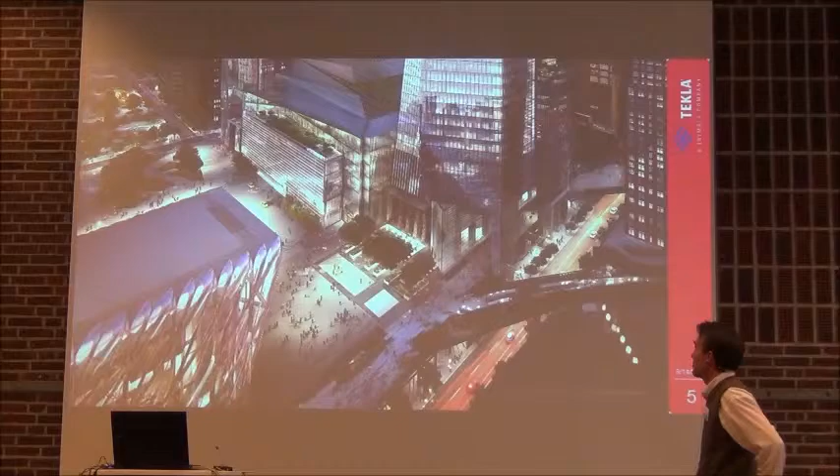Well, keep looking up, because next time there's a whole part of New York which is being regenerated. It's called Hudson Yards. It sits on top of a railway track, and Tekla, of course, is well in the centre of getting those models and those buildings together. It's just near the World Trade Center, just north of that. Lots of really big projects going into one of the towers that's been done in Tekla, with lots of really big numbers, of course.

As I say, this is a massive scheme, a $20 billion US dollar construction scheme for the whole area. Mainly, a lot of it's down to the cost of the land, obviously. But in there, you've got 30 Hudson Yards. It's this building, not this building. Completion by 2019, around about the height of the Empire State Building, with lots of floor area. The architects are KPF, and the engineers are, of course, Thornton Tomasetti.

And don't forget, in the US, it's very much like, I guess, in Denmark, the architect very much drives the project. The engineers are employed under the architects, so it's very important that that team works together well. So how's this going to happen?

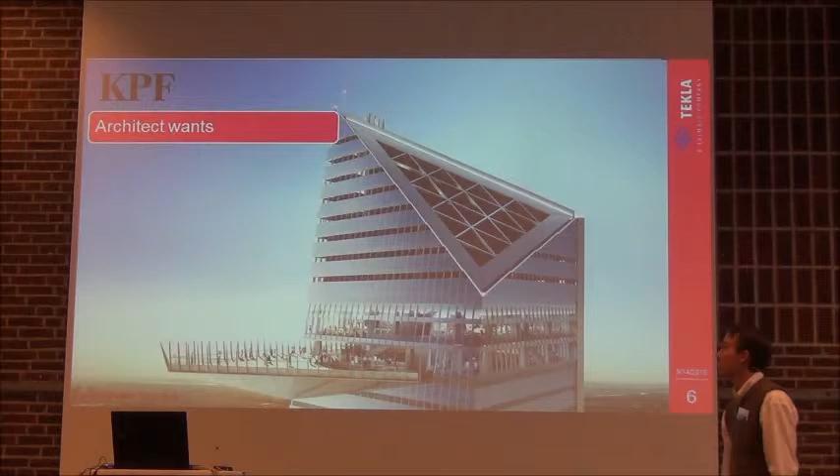Well, KPF, of course, want as much detail as possible. Because when you're doing cladding, setting out, when you're doing all of your setting out of your building from face to face, you want to know how you can maximize your office area, and minimize the spend on the buildings. LODs are really important, and you want to avoid redrawing structural.

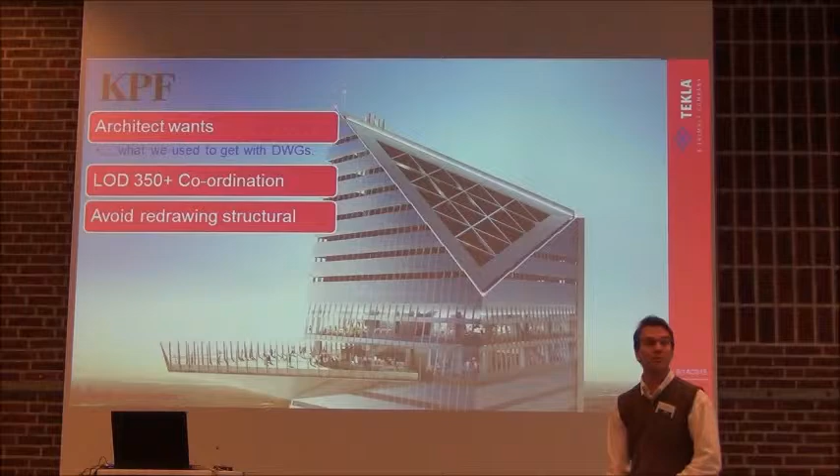They're essentially, in many ways, in all my years as an architect, that's what I wanted. I wanted as much information from the engineer that I could, that was accurate, so that I could reuse that. And of course, that's what we had with DWGs for years. That's the background, I guess, of what an architect wants: as much information as they possibly can, so they can reuse that and set out to that. It's very much a DWG story.

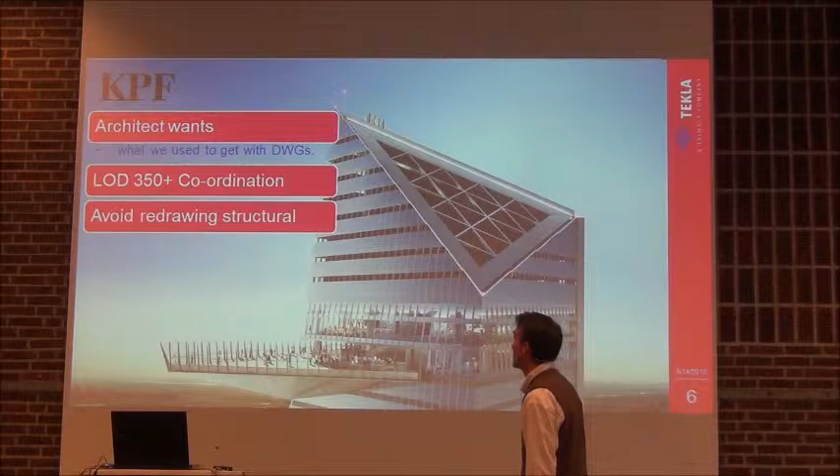So what is a LOD? That's the term I just used. LOD 350, for example, level of development. You guys have had this already for years, talking about levels, 1 through to 4 to 5 to 6. The LOD is kind of, I guess, a phrase that's being built out of the BIM story. We're trying to explain exactly what you need to deliver as an architect on this project, or an engineer or MEP guy on this project. What level of detail are you working at?

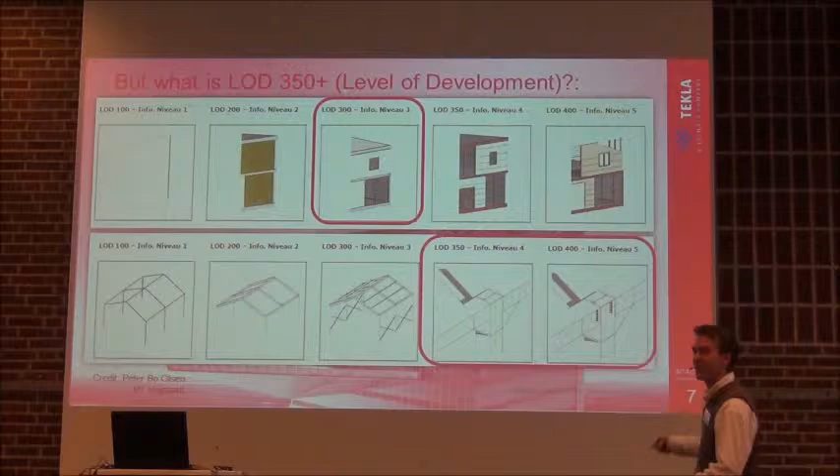Engineering-wise, that means LOD 300 is about here. The challenge, of course, is that Tekla instinctively, out of the box, goes to 350, 400 very easily. It's very hard when you're using Tekla to model down here, because it's always been designed for LOD 400 to 500, and it does it automatically, as you can see here.

So it's just me trying to play around, trying to recreate Peter's work here - thanks to Peter for this. But it's very hard to actually just create half of a LOD story. So that's the challenge: Tekla is very much a product that designs to the end game from day one. It's very good at doing that.

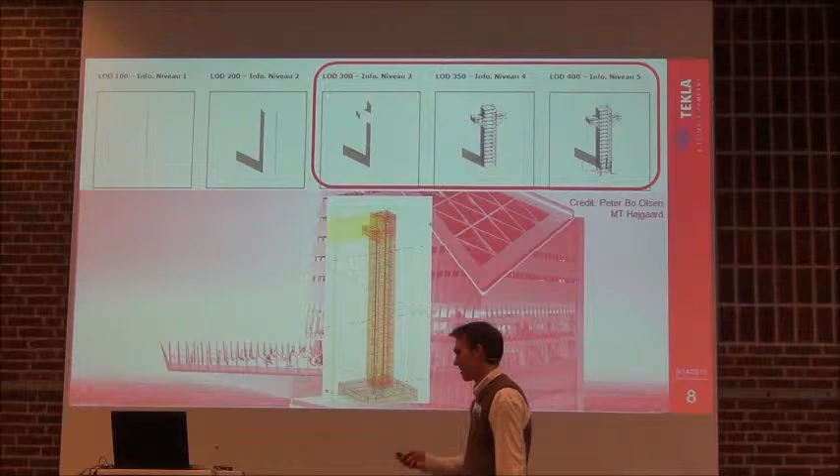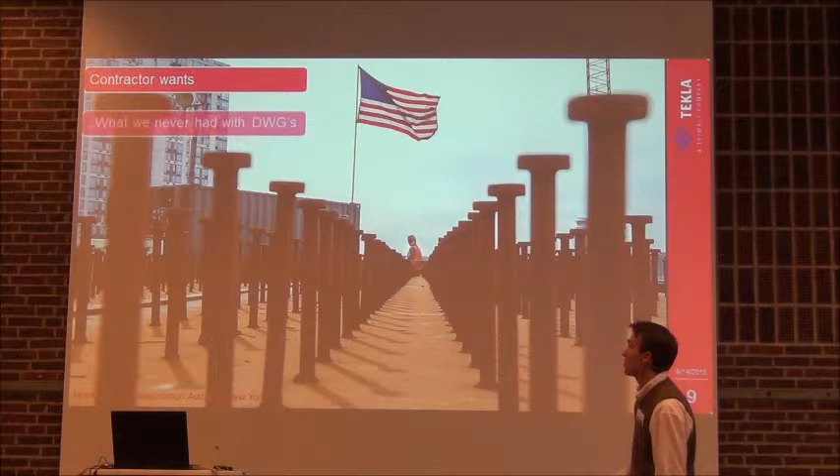So the challenge is the architect's working up here, engineers will be working down here. So how do they work together? And then of course you've got the contractor. What does he want? Well, the contractor wants what he always wants, and what he never really had with DWGs in years gone past - he wants it right first time and on time.

And of course that's the real benefit of the Tekla model, because we're going to start way down here with the pins and work backwards upstream. It's all about delivering exactly what that guy needs on the day - right place, right time, first time, no mistakes. That's the story we're trying to chase, because that's when you're saving time and saving money.

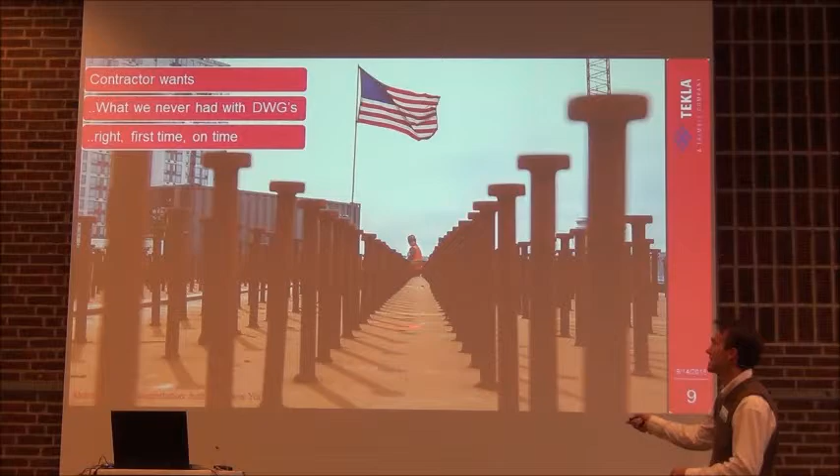You don't want to install these guys in - that guy brings it in, places it, doesn't fit, doesn't work, then has to search for a solution.

So this is what Thornton Tomasetti said - he's the engineer of this project. They're trying to get rid of this risk in here, all these potentials for delays. There's these different kind of phases: develop design, construction design, bidding. What they're trying to do is move all that backwards.

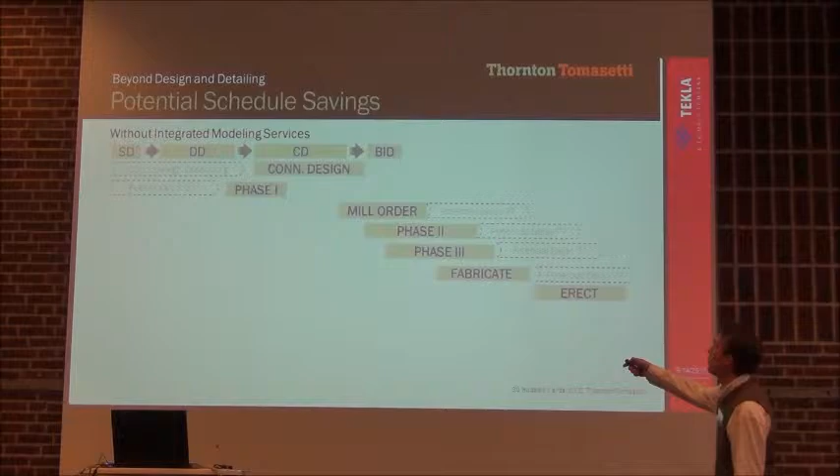How can we bring all the connection design in-house? So they bring guys in-house, like steel detailers, as part of the project team. They bring the mill order way back into develop design, they bring all the connections way back here. And so they remove all of this risk of delay, because they have this team working in one single model, doing not only the engineering but the detailing.

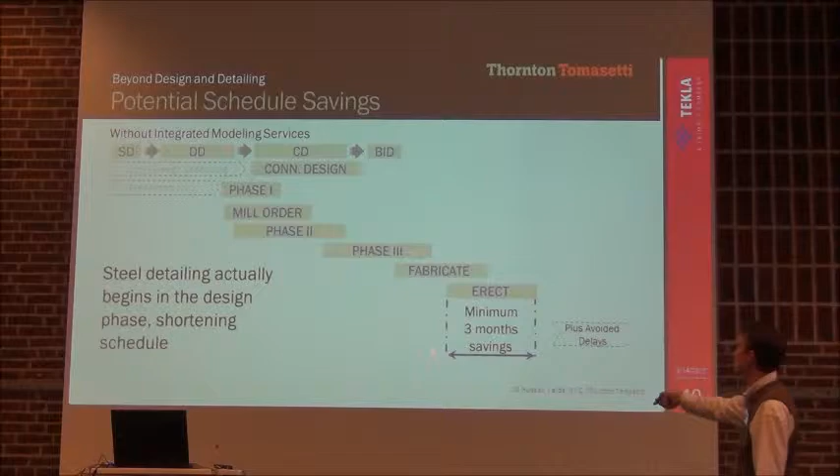So that way all of these phases reduce their risk, corrections, minimum, etc. This is why Thornton Tomasetti used Tekla on this project - because you can have everyone in the same model very early on, and you can reduce delays and risk later. The other problem they had, of course, is that Thornton Tomasetti is global.

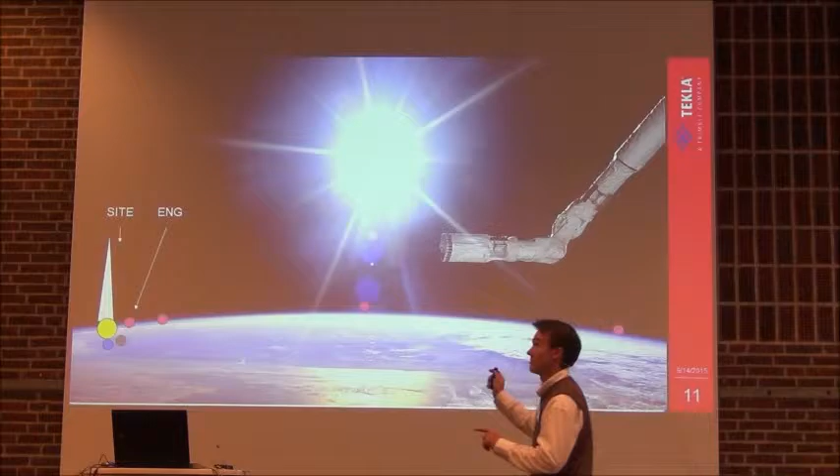They have offices not only on the project site but around the world. How can you utilise that whole team, which is around the world - in India, in Europe, in the US? How do you use the whole team on this massive project effectively? The solution, of course, Tekla Structures - first solution, right first time.

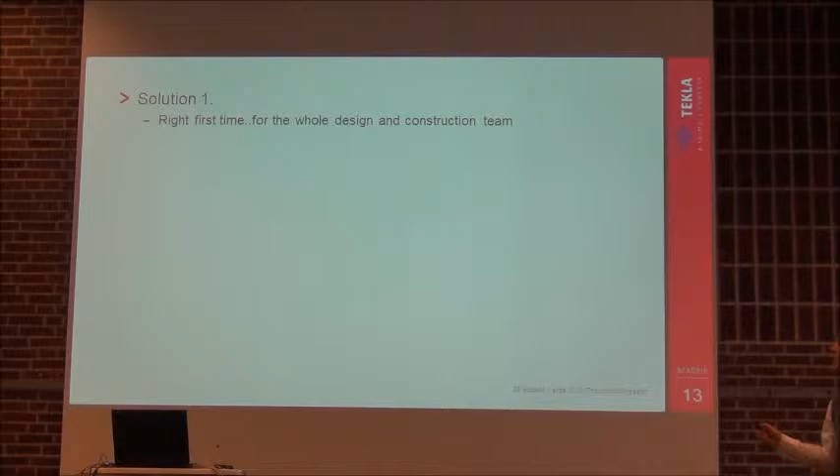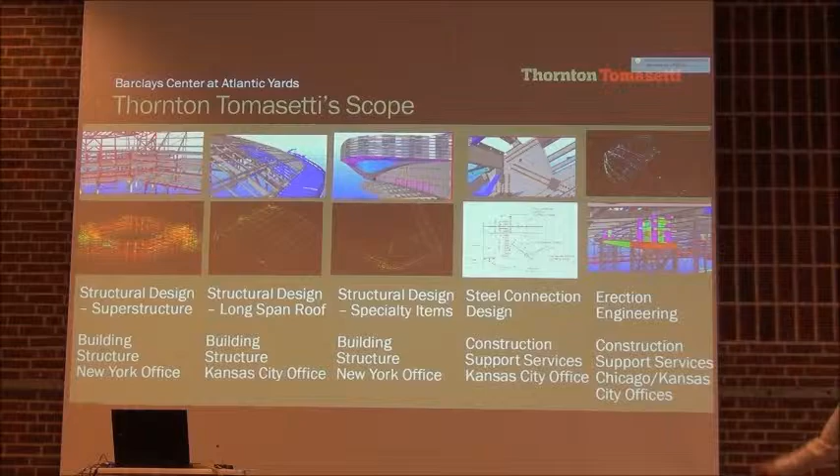So Thornton Tomasetti, this is a classic Tekla story - check out the website, loads of webinars on this. They use Tekla all the way through: superstructure, long span roofing, specialty items, connection design, erection engineering on site. One model all the way through, engineers as well as detailers on the same model working through these connections. Classic Tekla story - that's not new to you.

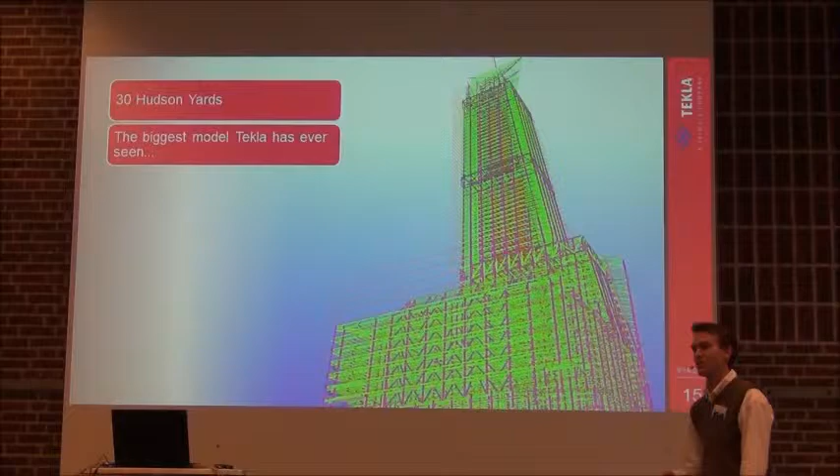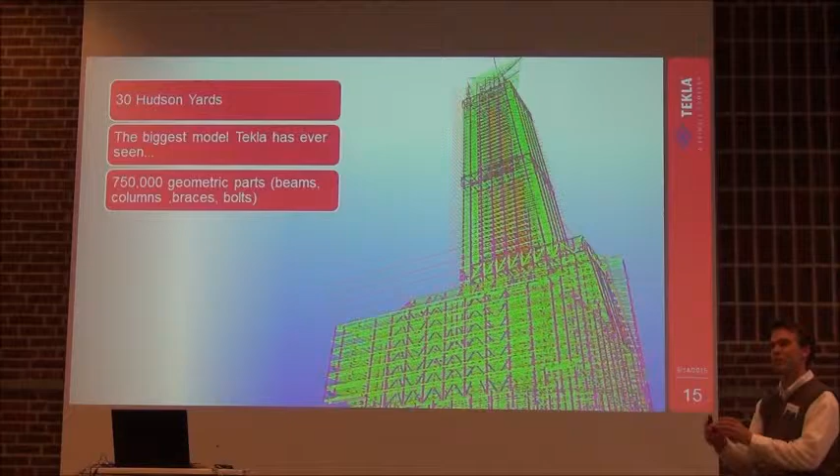The model is massive - actually the biggest we've ever seen. Had the guys sitting there in the HQ sweating that this one's really going to hold together, but it certainly is. 750,000 geometric parts in that model, not including points and sheeting stuff. Real bolts and beams and stiffeners, all that kind of stuff is all in there, and it's all at LOD 400 plus. That's an engineering model - lots of detail, loads of detail.

And then the architect says, could you please send us your model? You're going, are you serious? What am I going to send you? And as Jeff says, don't waste our time and fee giving them something more advanced than they need. And this is the things that Thornton Tomasetti said he finds working with architects.

You've got to be careful what you give them, because often they don't really know what's available, and they can't have the whole model. So for basic stuff, for collaboration, when going out to the architectural team or contractor team just to coordinate, IFCs are absolutely fine for that. Navis is great, really good at IFC import, Revit's okay, you bring it in.

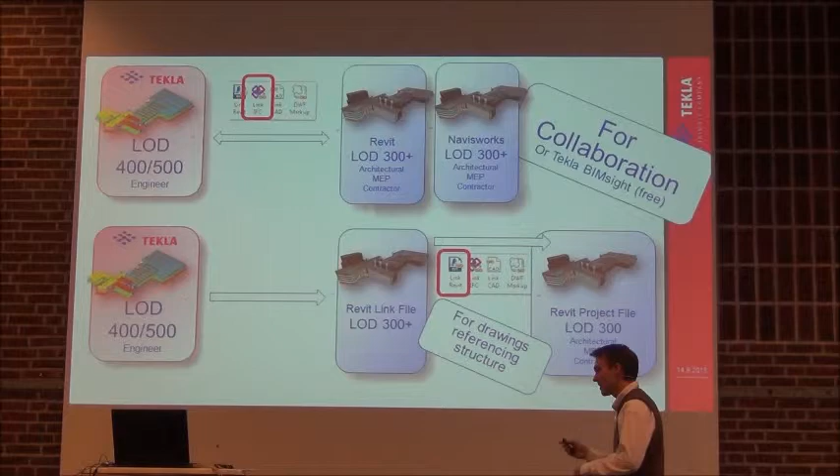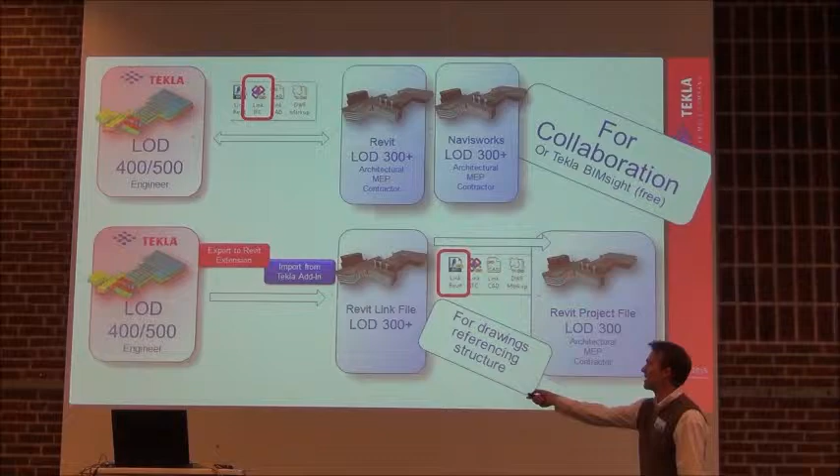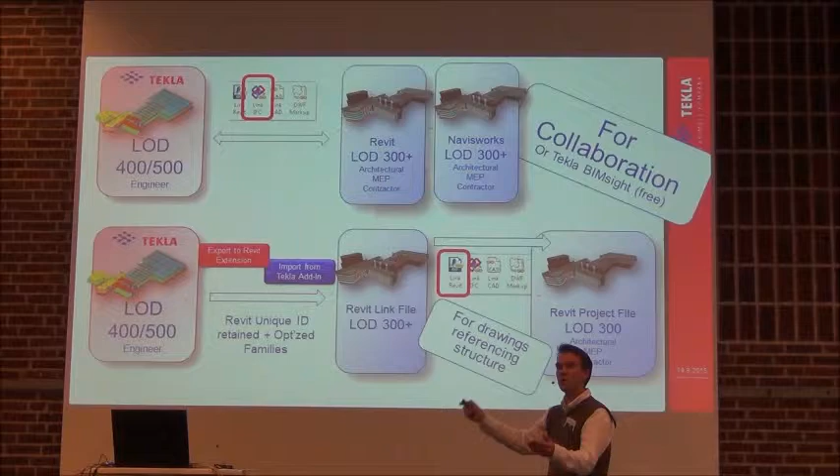But if you are doing more deep stuff, like referencing the structure, or doing scheduling from the structural model, within Revit you can bring it in. We have links that take it out and bring it into Revit, allowing you to link it through to your architectural model. The key thing is those links then maintain the Revit ID between updates. Bring it into Revit, IDs are maintained, update it, IDs are maintained, same part.

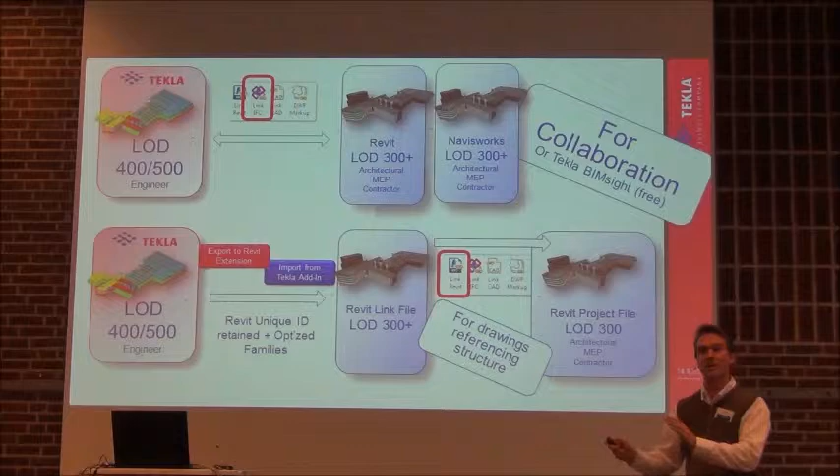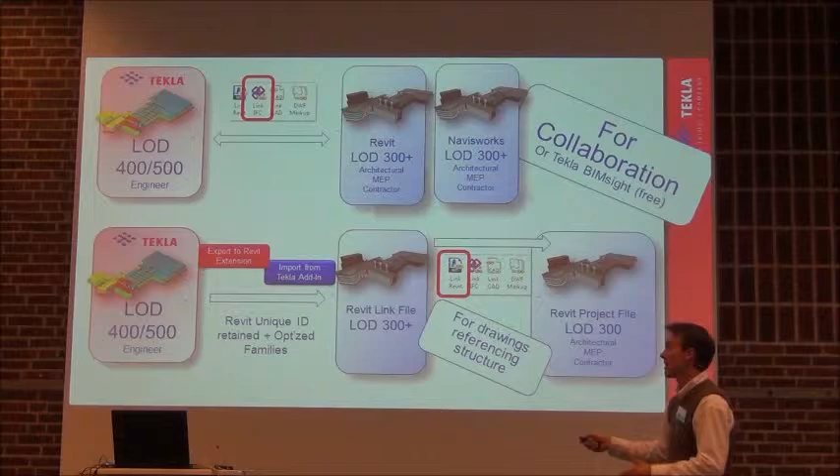This is what Thornton Tomasetti does with KPF. Mostly they give them IFC because they're just coordinating, just saying does it fit. If they are doing things like core walls or columns, and want to maintain those from the Tekla Structures model, they use this one here.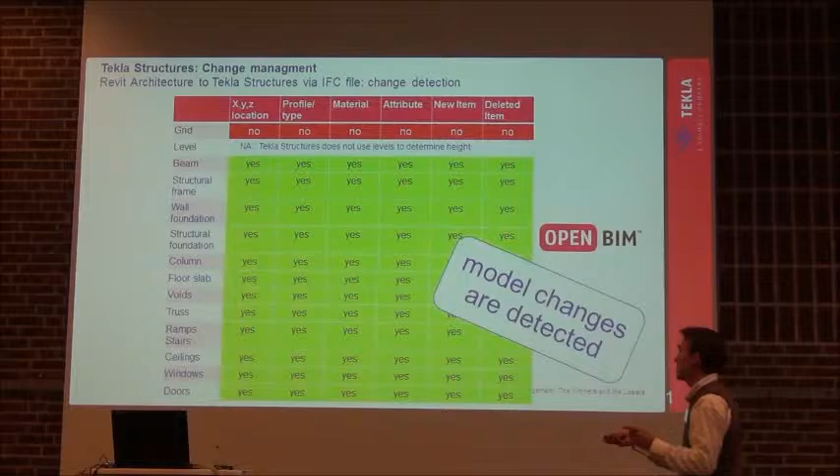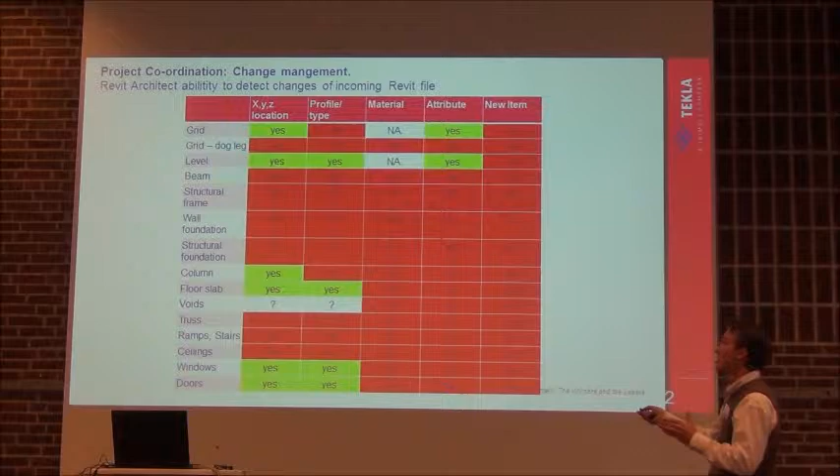But of course, when you go the other way back out to Revit, you've got to know the story. This is coming through from Revit users - if you use Copy Monitor, you go from Revit to Revit, you can't pick up changes in beams, that kind of thing. So the only way you can communicate Revit structures to Revit architecture is through using drawings. You've got to use the clouds because Copy Monitor won't pick up those things. Unlike IFCs, where you can pick up everything, there's just limitations in software. So Revit to Revit doesn't pick up changes.

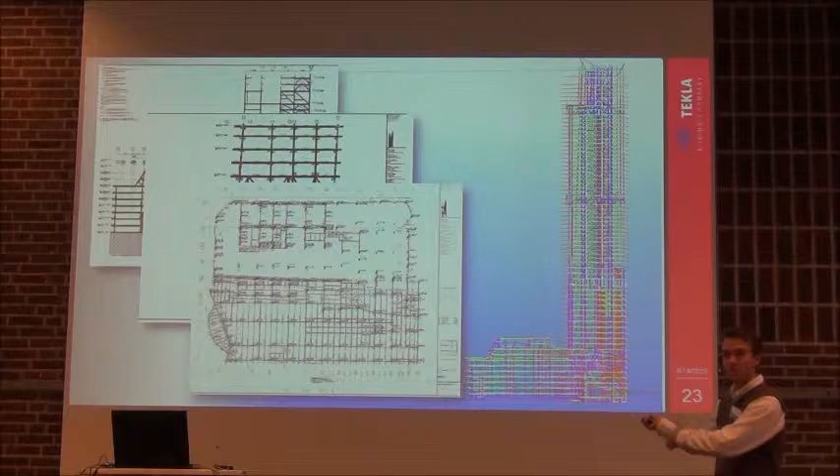Use your drawings - so 30 drawings coming off this model, no problem, just cloud them. KPF love it. Everyone's happy. Next thing, on time.

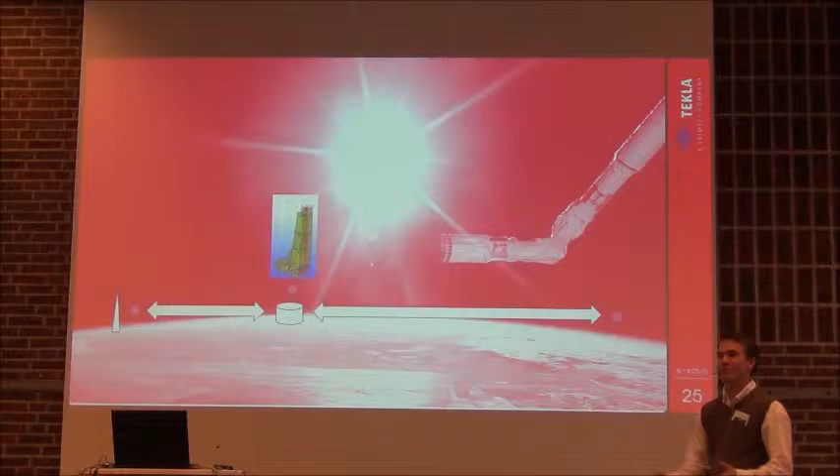You've got a global team, so how are you going to distribute that work across the planet? Some way you're going to try and work together - you put all the model in one place and do these really fast VPN links in, and this doesn't work. Everyone knows that this is a real challenge.

What we've done with these guys is, because they work around the world, these are all the offices, places they can work. We built something new called Tekla Model Sharing. Tekla Model Sharing is all about sharing the changes, not the model. This is extremely light - all the models are actually native. The model exists in multiple places, but only the changes are shared.

So in this one here, a lot of data has been shifted across the server - 112 users in the model, 38 in one model on a daily basis, working on that 24 hours a day. I'm not quite sure what happens on Saturday or Sunday, but anyway, this is what they say. So what they get is extremely light transfer of information on this massive model 24 hours a day.

So extremely efficient way of working - the engineers are not behind time. I can guarantee you that they're always waiting for the rest of the design team to send them information. Very successful, that's how they're doing it.

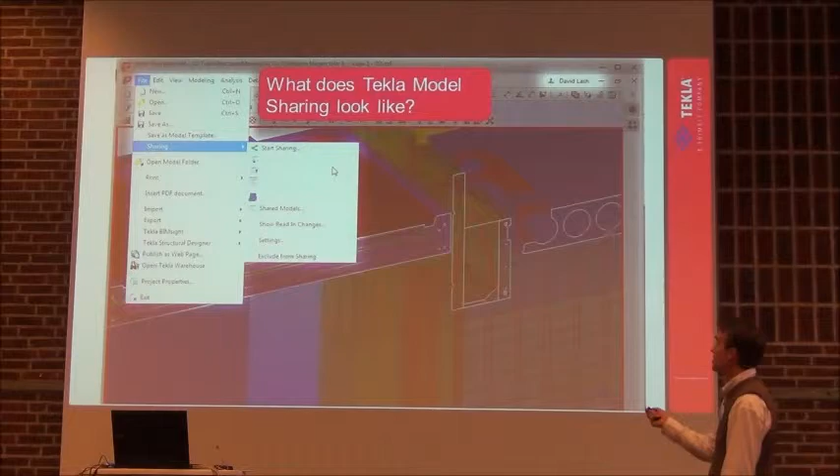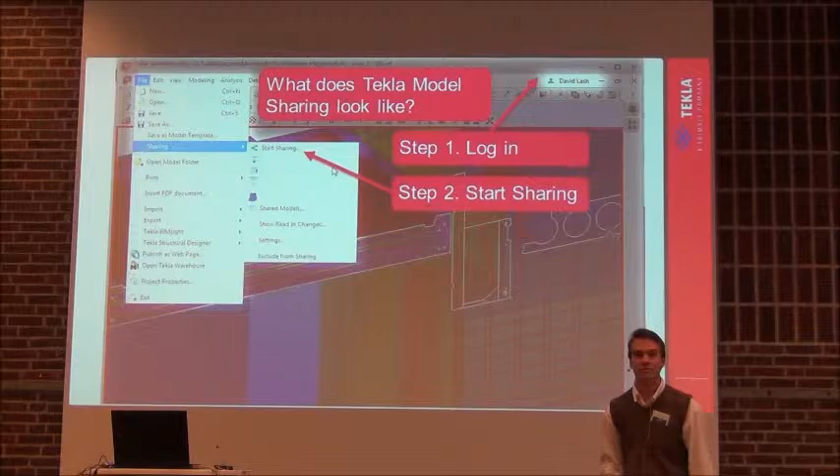So what does it look like? Well, on your screen in Tekla Structures, you just log in and you start sharing. There is no IT backend, there's no installation to server, there's nothing - the whole thing is handled by Tekla. It's licensed, it's extremely cheap, and all you do is start sharing, and away goes the model. It's that simple. So your IT department will love you.

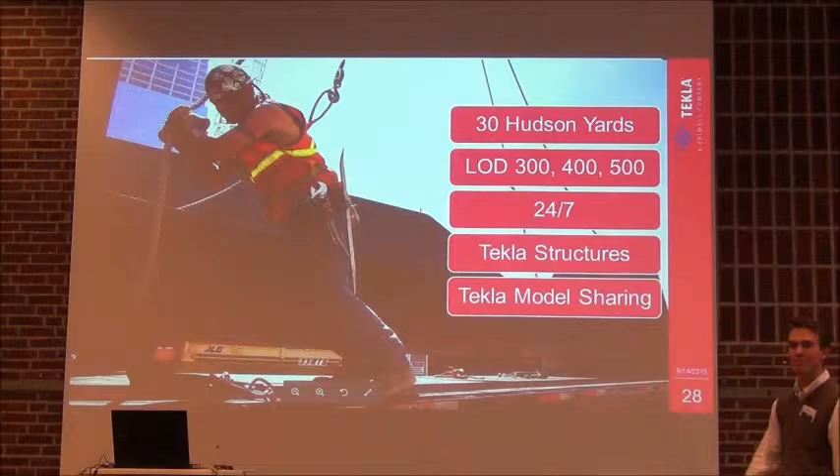So that's me, I'm on time. People asking, how do they do it? Well, they're going LOD 300 out to the architectural, 400 to 500 out to the site. You need to know when this stuff is coming in and it's the right size, the right first time - he gets really upset when he's putting in a beam and it's the wrong size. Trust him - so Tekla Structures for these guys, and Tekla Model Sharing for the design team for 24/7 modeling.

And don't forget, next time in New York, look up - there'll be some changes in the skyline. See you there, thank you very much.